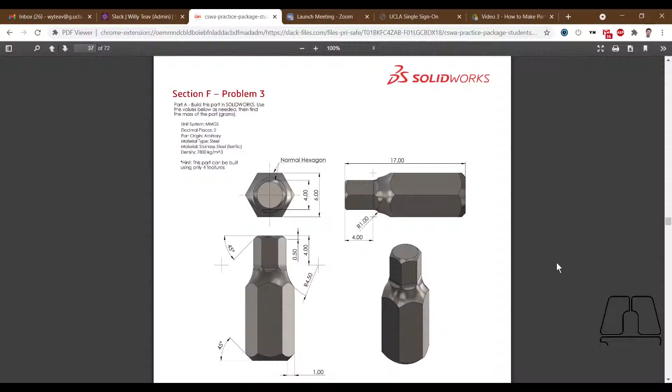In this video, I will be showing you how to model this hex bit. This part is pretty tricky and uses a revolve cut.

Alright, the first thing that we want to do is make sure that our units are correct. Right now we see it's in millimeters gram seconds, which is the unit that we want. Next we will edit the material. And the material will be stainless steel, and we can just search it up in this handy search bar, hit apply, and we see here that the material is applied.

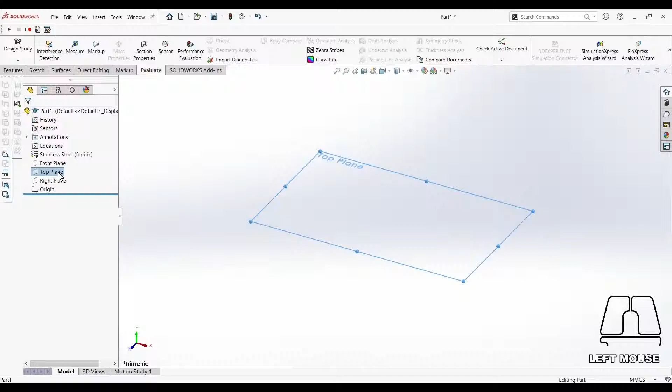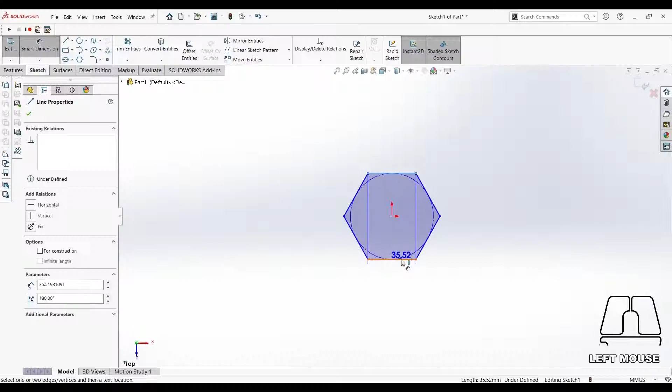Our first feature will be an extrude on the top plane, and we'll be starting off with the bigger of the two normal hexagons. So a hexagon has 6 sides, we'll leave that at 6. And now we have our hexagon, and we can go ahead and dimension this distance to be 6 millimeters.

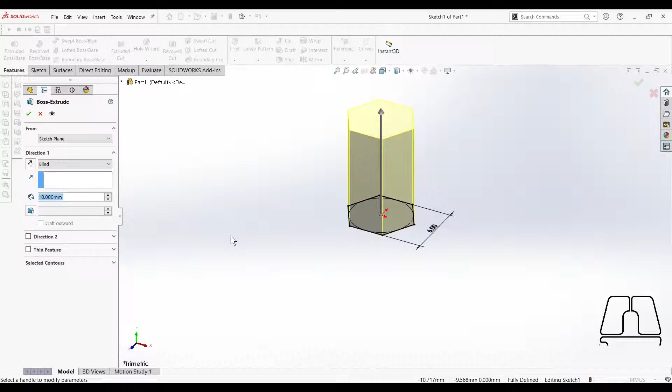To fully define this hexagon, we make this point horizontal to the origin. And now we finish the feature using a boss extrude to a length of 17 millimeters.

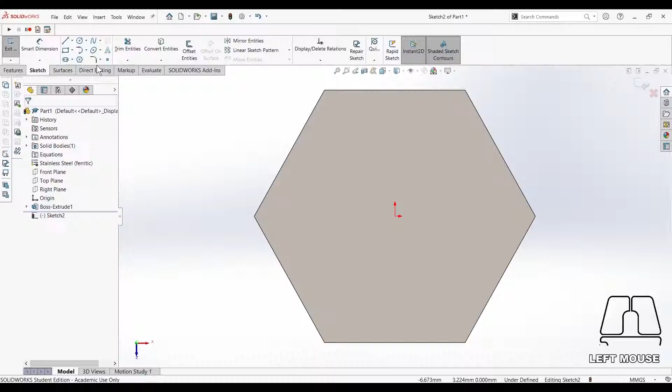Alright, and now for the next feature, we will be making the smaller hexagon, which will be from an extruded cut. We can start off with a sketch on this top face. We repeat the process. We dimension this distance as 4 millimeters. And again, we make this point horizontal to the origin.

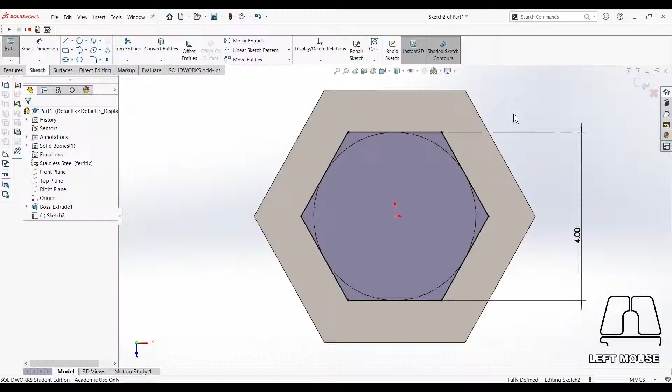Now we can make an extrude cut. We select flip side to cut. We will let this distance be 5 millimeters. In the drawing, it looks like it might be appropriate to use 4 millimeters, but we'll have a 1 millimeter fillet that we need to account for, so the extrude cut will be 5 millimeters deep.

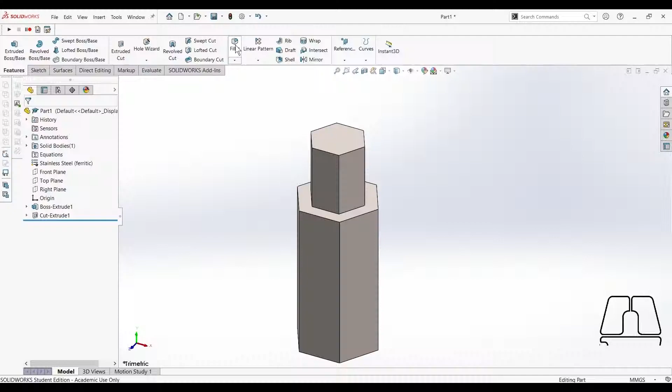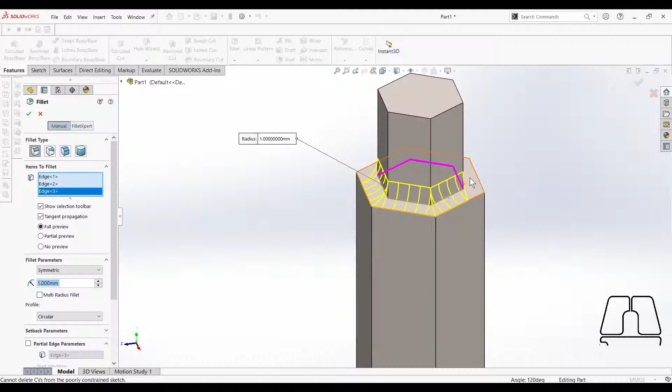Speaking of that fillet, we can make that feature now. The radius will be 1 millimeter, and we will select this edge, the edge that connects the smaller and the larger hexagons. There's a little option here that lets you select all of the edges that are connected to a loop.

This is our part so far, and now we will create the final feature, which will be a revolve cut. It's very important that you use the plane that, when you are normal to it, will show 3 faces as opposed to 2 faces like this one. For me, that plane will be the front plane.

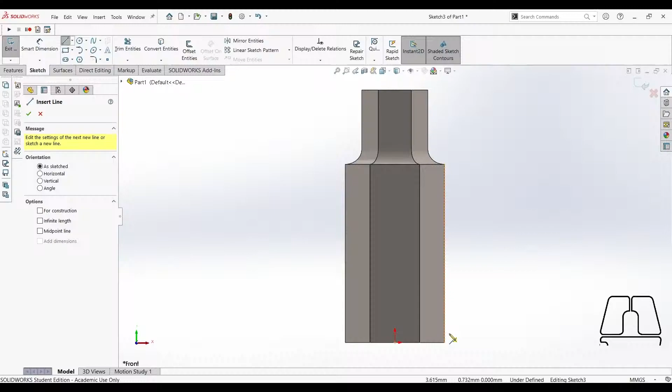So we'll start off with this little chamfer. We'll just draw a right triangle, and then we'll dimension this angle to be 45 degrees, and this horizontal distance to be 1 millimeter.

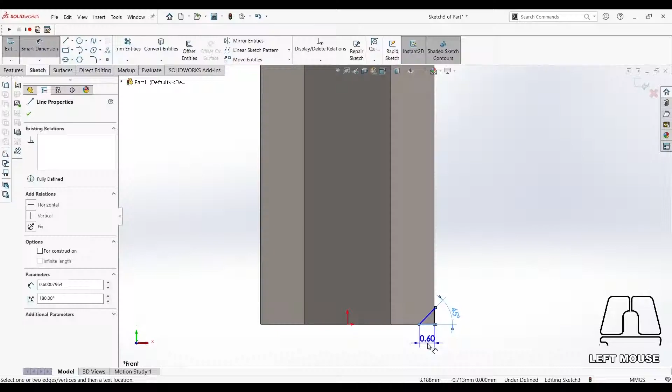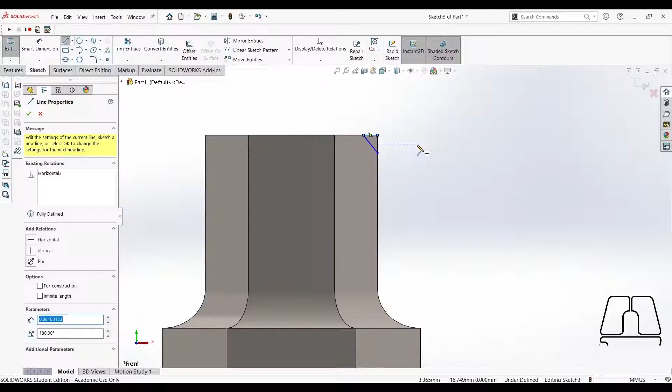Next, we will define the chamfer on the top. We do the same thing, we make a right triangle, making sure that we don't accidentally snap onto any of the midpoints, otherwise it might be a little annoying to delete the relationships. Make this 45 degrees again, and this time we'll dimension the horizontal line of the triangle, and that will be 0.5 millimeters.

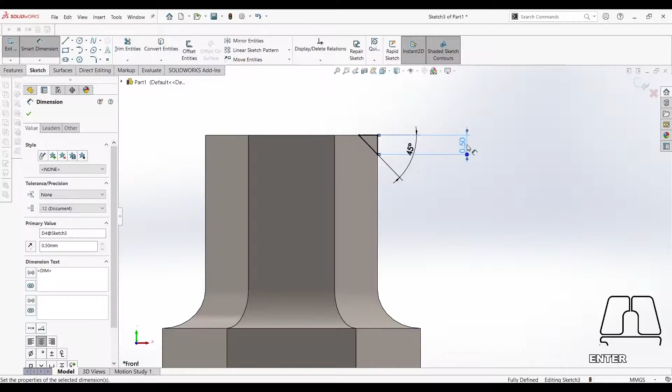Okay, and now we will be making a circle and give it a radius of 4.5. Select the center, hit shift, and select the perimeter of the circle. So this will have a radius of 4.5 millimeters. And then the distance from the center of the circle to the top of the part will be 4 millimeters.

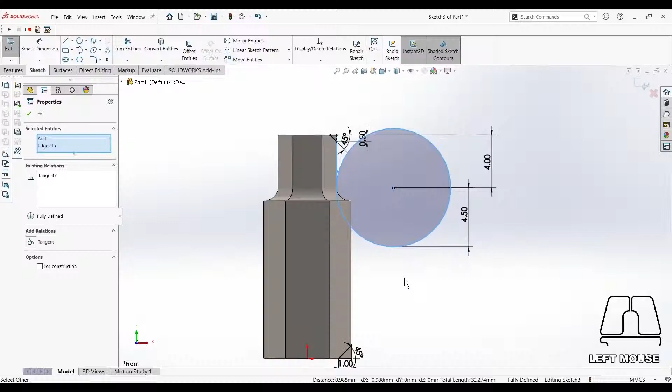Before we define the circle, we select the edge and make it tangent to one of these vertical faces, one of these edges. Now we can see that our sketch is fully defined. We will be making a revolve cut. In order to do that, we need a center line. The center line should be connected to the origin.

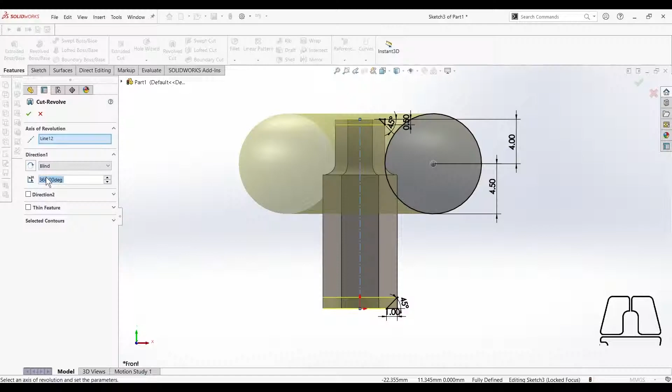So we have everything looking nice, and we can do a revolve cut. Make the axis of revolution the center line that we made. SolidWorks should automatically do that, and then we'll have the cut go all the way around, so 360 degrees. And voila, our part is finished. Finally, as a final step, we should make sure that our mass properties are consistent. That's the finished part.